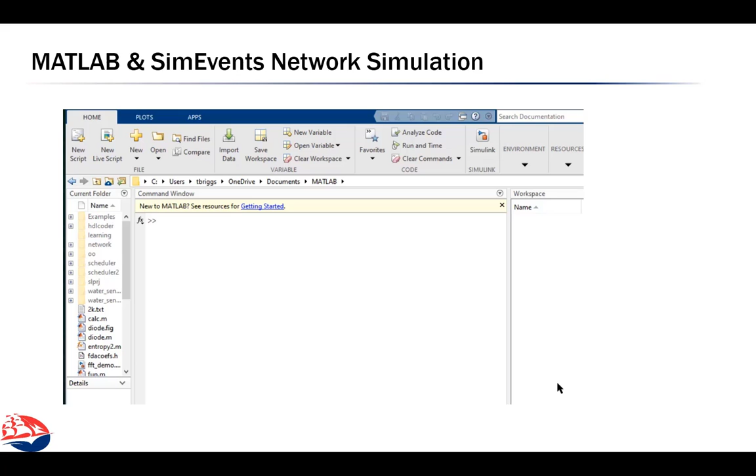Here we can take a look at building a very simple network model in the SimEvents tool within MATLAB. So this demonstration is using MATLAB and the SimEvents tool to model a simple network. So to get started, what I want to do is start SimEvents, and I can do that just by typing in SimEvents from the MATLAB command window.

This will bring up a model library, and this contains each of the different basic types of things that we can use in the SimEvents system. SimEvents is not network specific, it represents anything, and so in this case we're going to use, for instance, entities that just represent generic things; we're going to use them to represent network packets.

So to get started, I'm going to make a new model. I'm going to move this over here just to kind of get it out of my way. And I'm going to add that entity generator, and again, we'll make this represent network packets. There's the queue. Here's our entity server, and we'll throw in our terminator. Alright, so I'm really done with the library, so we'll put that out of our way.

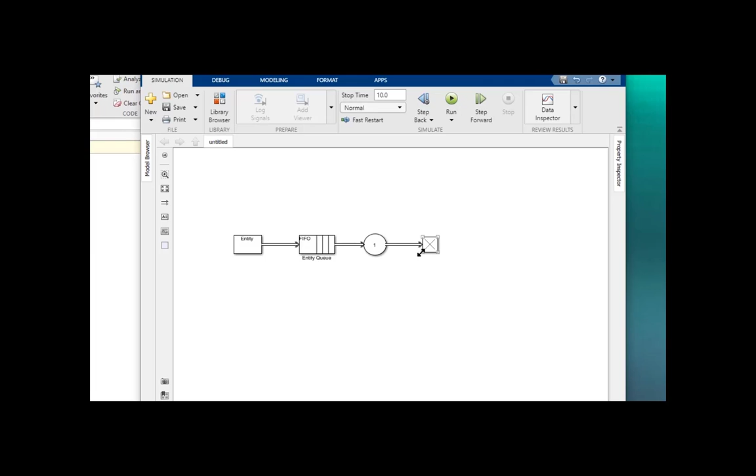What I want to do next is I just want to go ahead and connect these guys. And to make sure that everything works, we'll go ahead and hit run. And nothing major here is really going to happen. Okay, so it ran. Yay. I might be interested, though, in seeing some statistics, and get those.

I can turn on statistics, and so if I want to see the number of entities that were departed, or the average waiting time might be really interesting. The average queue length is also something that we're often interested in. And so what I want to be able to do next is to include the Simulink library.

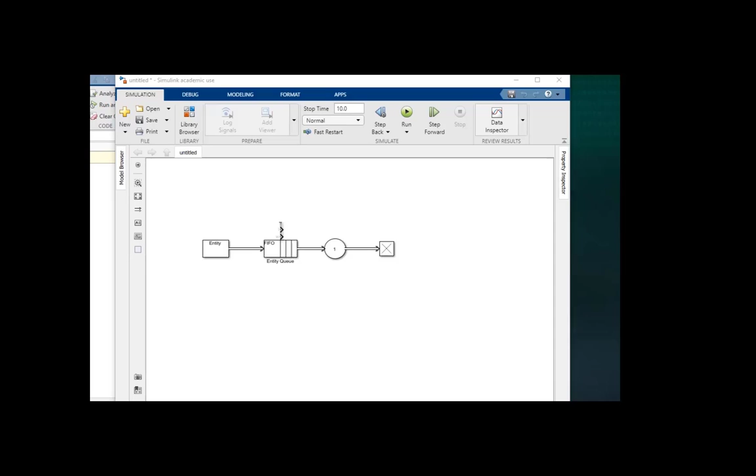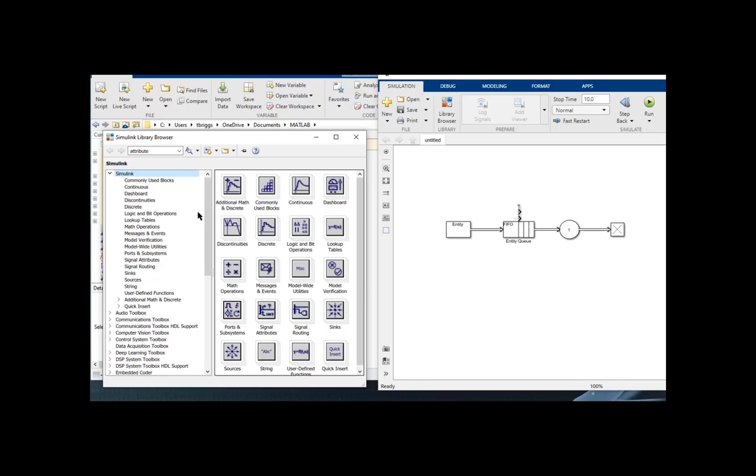Alright, so the Simulink library has a lot of things going on here. And what I'm really interested in is going to be here under sinks. I want to be able to see the... actually, maybe we'll do an oscilloscope view. So let me add an oscilloscope that's going to have our queue length, and we'll have another oscilloscope view that's going to have our waiting time.

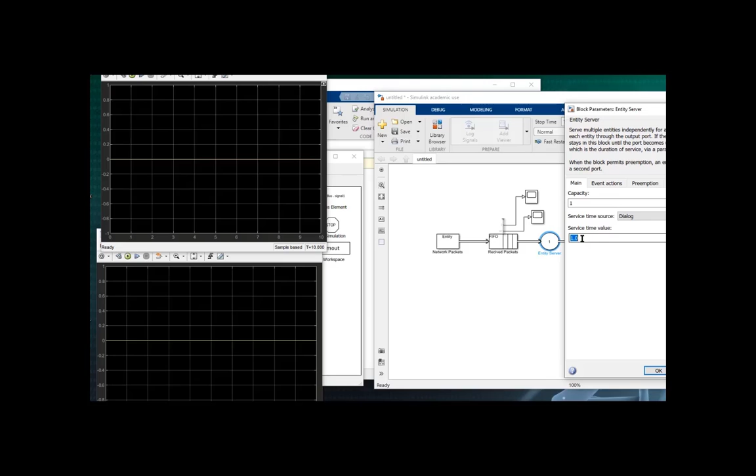Alright, it might be a good idea now to kind of give names to these things. So now if I go ahead and run this, I can click on these scopes, and the average waiting time was 0 and the average queue length was 0. Well, let's see what happens if I change the entity server's processing time from 1 to, say, 1.5.

And now when I run this, we can see that the waiting time starts to increase, as well as the average queue length starts to increase, kind of uncontrollably, because packets are coming in once every clock tick, but they're not leaving once every clock tick.

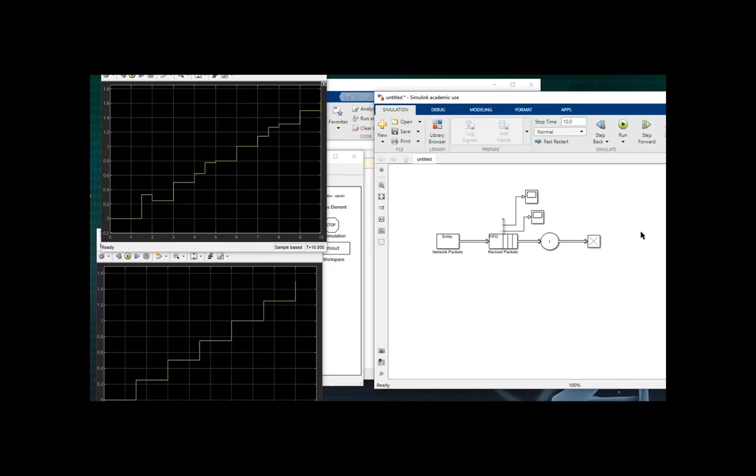One of the things we can do now is we can change the way that packets are generated. And so, for instance, if I were to go to entity generation, I can change the time source from a dialog to, say, a MATLAB action. And this is any MATLAB code expression. And so this is going to be a random number.

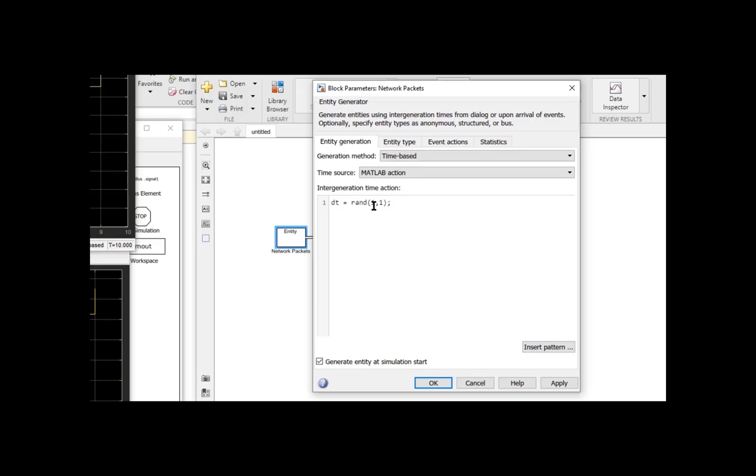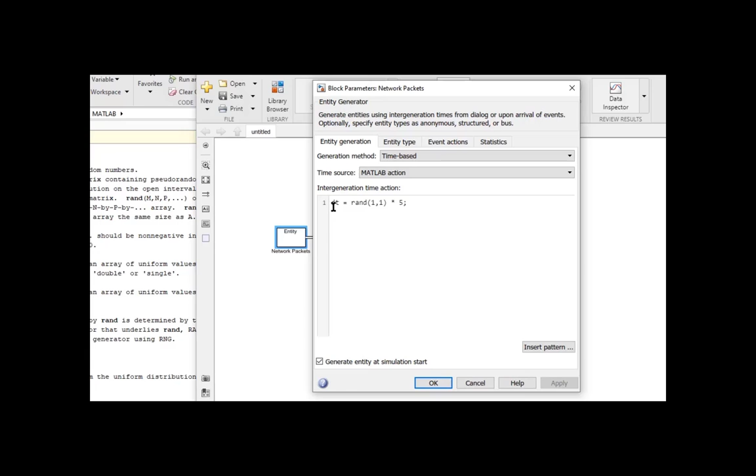Okay, so if I don't want the generation to be so fast, what I can do is simply multiply that by some number. Let's say by 5. So if rand is going to give me 0 to 1, multiply it, it's going to kind of stretch out the time by 5. And so this is actually the time between the next event. This is the delta t, is what that's supposed to represent.

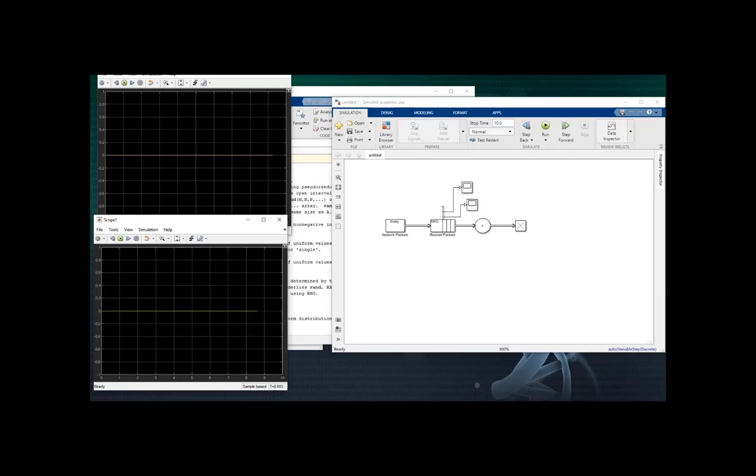Alright, so let's run this thing again, and we'll take a look at our two graphs. Actually, one more statistic might be interesting here, just so that we can see what's happening. We can either generate it here on the FIFO or generate it here on the server. We can go here to statistics, and we can say either the number of entities departed, and maybe we want to see how busy our server is.

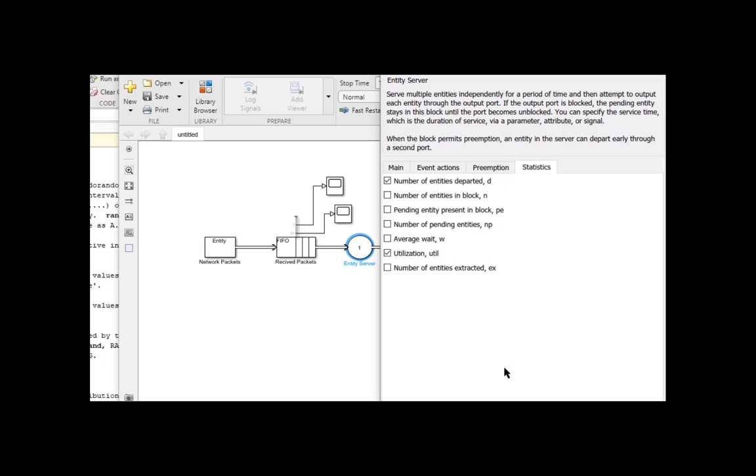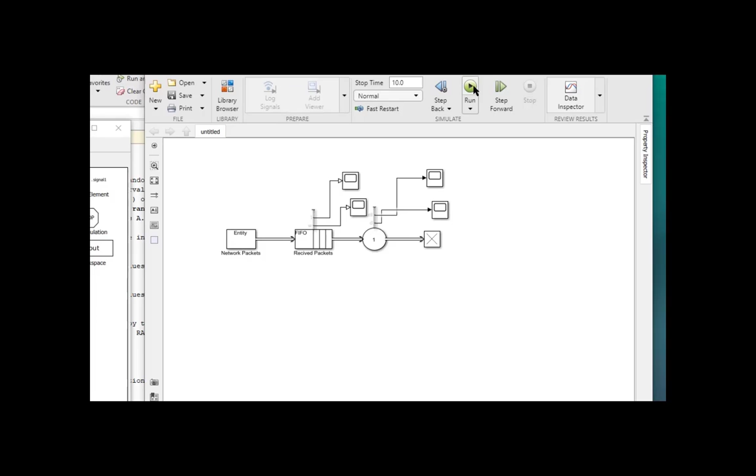And so we'll turn on those two statistics, and you guessed it, we'll add 2 more scopes. And again, I'm just going to connect these two, the outputs to the inputs, and let's run these. And now I got scopes all over the place. But we can see this is the average utilization, and this is the number of entities that departed.

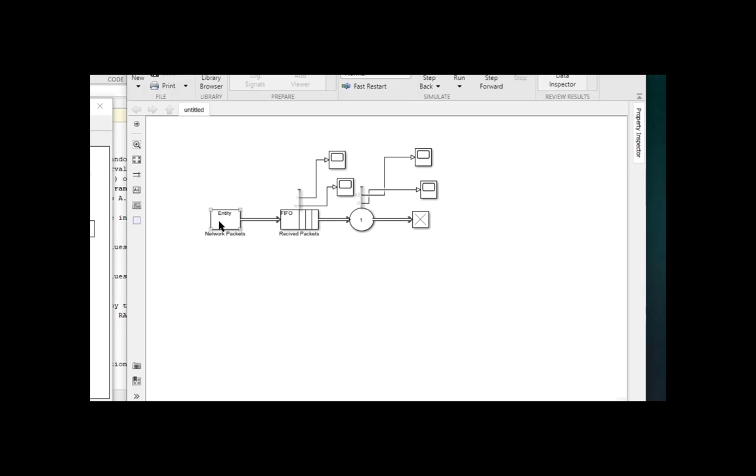So let's go and make one more change. And then what we can do here is go to event actions. And here, entity type first. So in event entity type, what I want to do is I want to take this attribute 1 and I'm going to call it processing time. And in processing time or proc time, what we can now do is when we generate the event, I can come in here now and say, let's click on insert pattern.

We'll do random number. And so what MATLAB has done here is it's generated a bunch of code, probably way more than I would have. But it generates a random seed. It generates a, this is the kind of bandwidth of an exponential function. It's going to generate that function and store it in x. And so this is going to, again, be between 0 and 1. That's what that mu means.

So let's make that mu be 2. So that'll be our processing time. And then we can say entity.proc time is equal to x. All right, so now whenever an entity is being generated, it's going to generate how much time it should spend on this server. And over here in this server, when I say how much time does it take on that server, I want to do an attribute, and the attribute is going to be proc time.

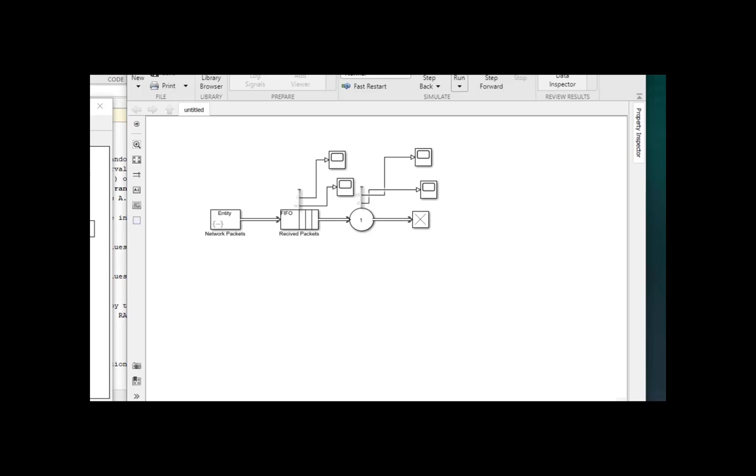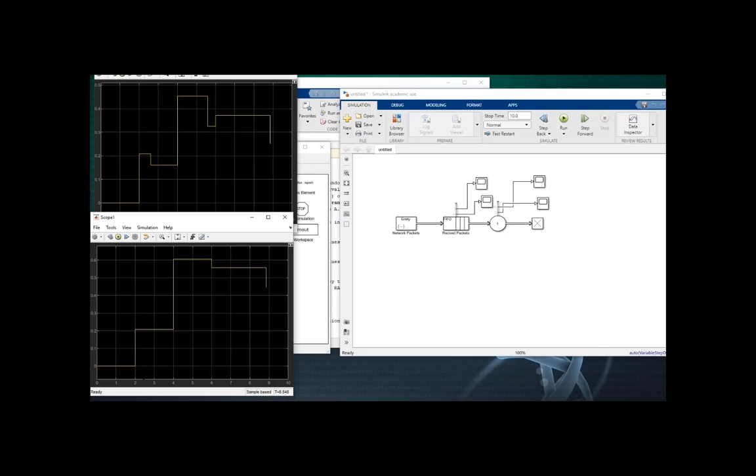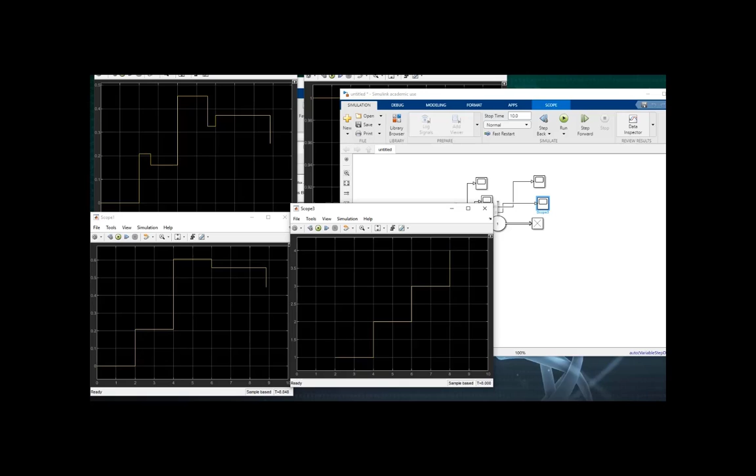Now, when I go to run this model, we can start to see that the processing time is kind of randomly happening. So let's bring up these other two scopes. The utilization is, we're starting to get overwhelmed here. I'm sorry, this is utilization. So we're always busy, and then at the very end we kind of fall off. So apparently there was not an event right there. So we're still kind of generating more events than what the server can handle.

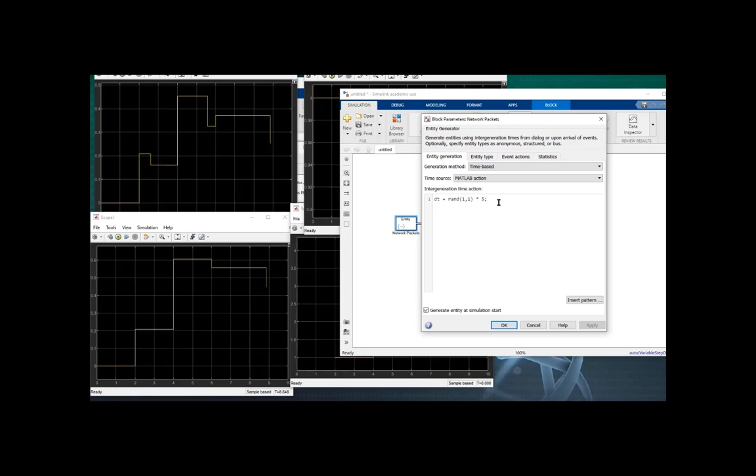So let's go back one more time to our event generation. And instead of generating an event every 5, let's double that and make it, we might generate a few events, but we may only generate one event in 10 seconds or 10 units of time. And so now if I run this thing one last time, look, we see that we actually only generated a couple of events, and the average queue time was 0.

Finally, we can take a look at Cisco Packet Tracer. I should comment that I've kind of horked this video from the Cisco Networking Academy, and the guy who does the presentations is really enthusiastic. I definitely, I guess, admire that level of enthusiasm. You'll see what I mean.